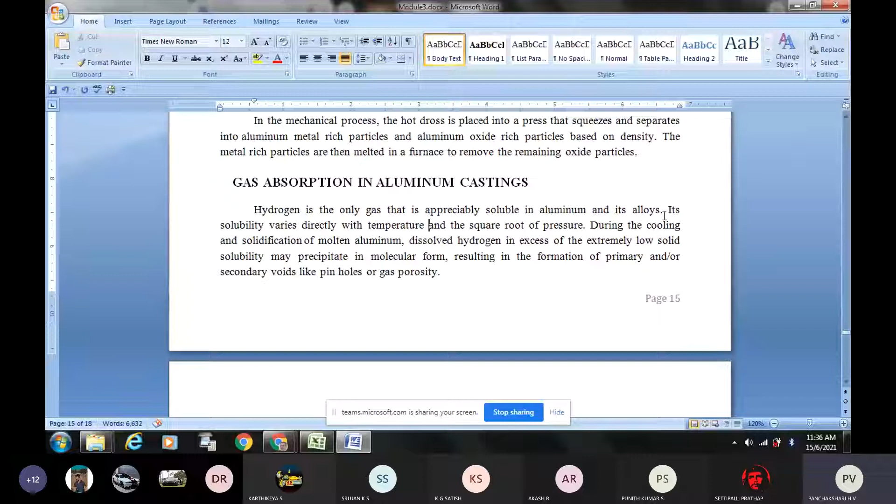The solubility varies directly with temperature. What does that mean? Higher the temperature, higher the capacity. If liquid metal is heated to a very high temperature, for example the melting point of aluminum is 660 degrees centigrade, but if it is heated up to 800 degrees centigrade, then the solubility capacity of the liquid metal for hydrogen is very high. But lower the temperature, the solubility limit will also come down or decrease. So its solubility varies directly with

temperature and the square root of pressure. Normally pressure is not considered because the melting is taking place at atmospheric pressure only.

During the cooling and solidification of molten aluminum, what happens? Dissolved hydrogen in excess of the extremely low solid solubility may precipitate in molecular form, resulting in the formation of primary and/or secondary voids like pinholes or gas porosity.

You should understand, when the metal is in the liquid state, its ability to dissolve any gas is very high. When it becomes solid due to removal of heat or cooling of the metal, it becomes thicker liquid metal and then finally solid. During this process, with the removal of heat, the capacity of the metal to hold the dissolved gas decreases. Higher temperature means higher capacity to hold the gas, and when the temperature decreases, its capacity to hold the gas decreases. Then what happens?

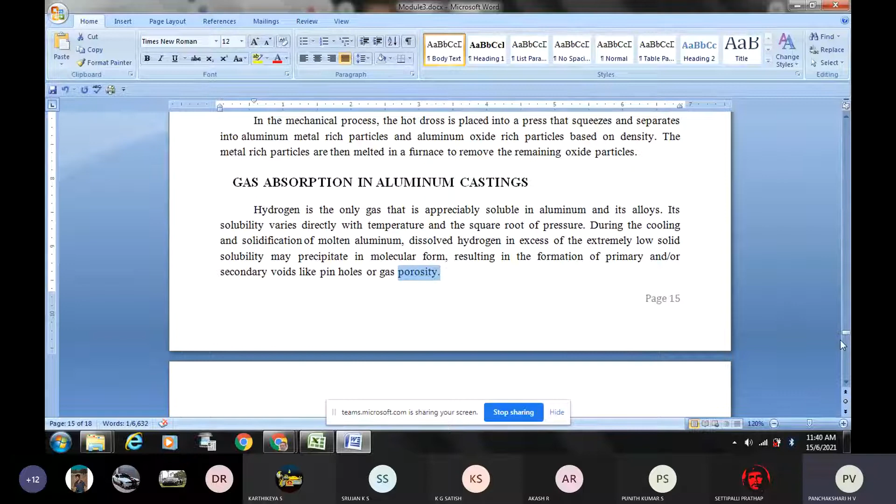So therefore, hydrogen is the major element which is being absorbed by the liquid metal, and therefore it has to be properly removed. That is the meaning of this.

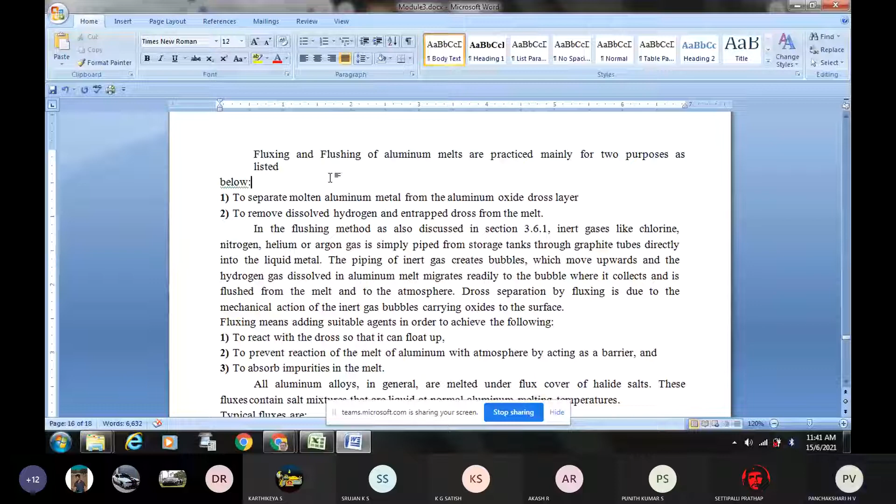Okay, so this is called gas absorption by aluminium metal, liquid aluminium.

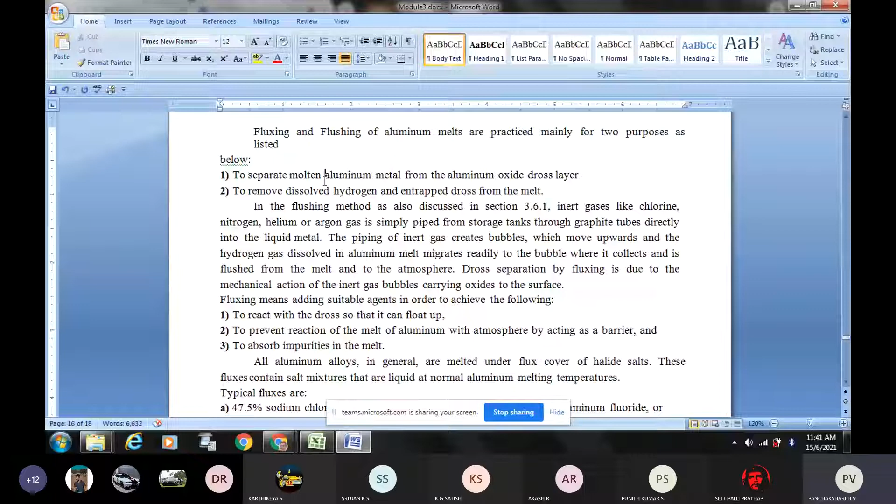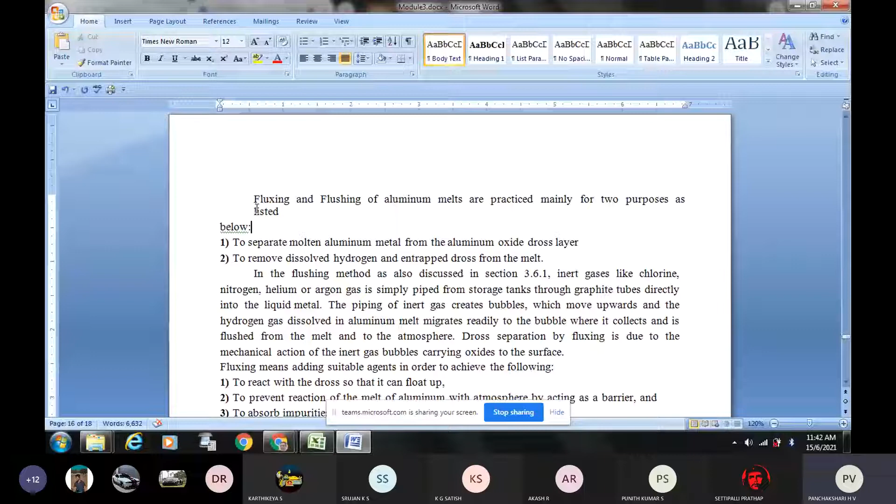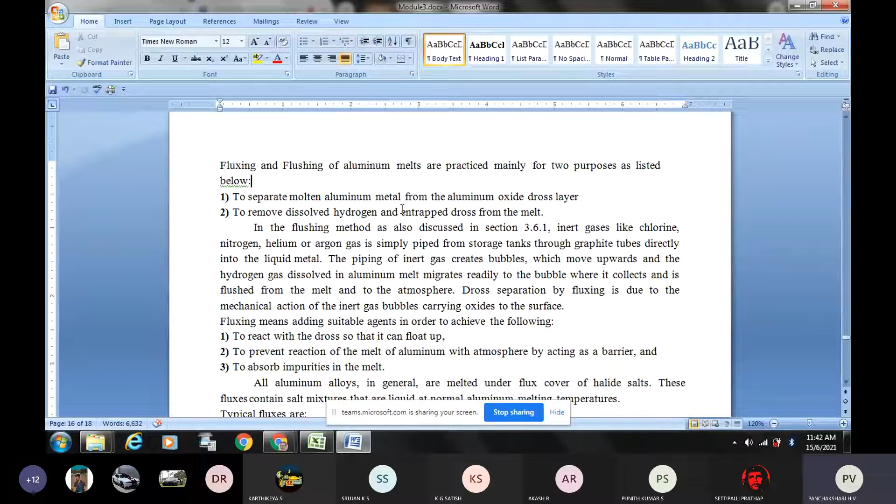To separate molten aluminium metal from aluminium oxide or dross layer, fluxing and flushing of aluminium melts are practiced mainly for two purposes. We are going to use the flux. What is the purpose of fluxing? We are going to supply flux like chlorine, fluorine, etc. Why is it required, and why is flushing required? It is required to remove the gas and remove the oxide layer or dross. It is carried out for that purpose.

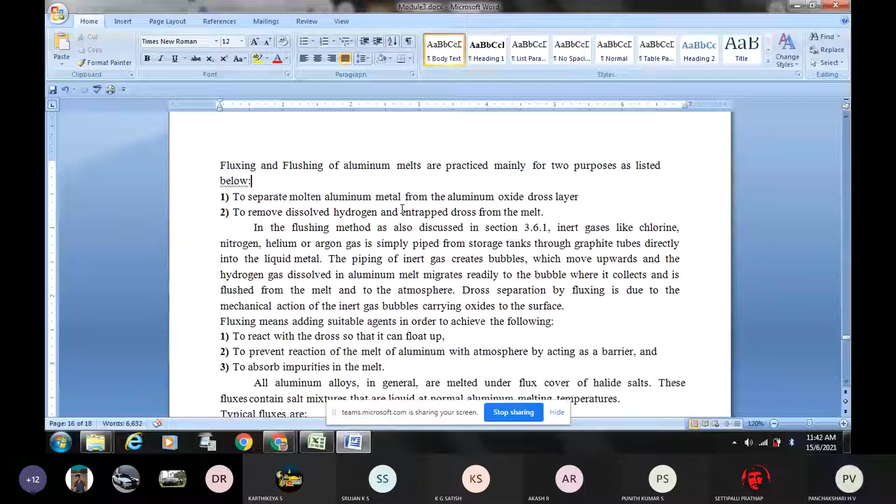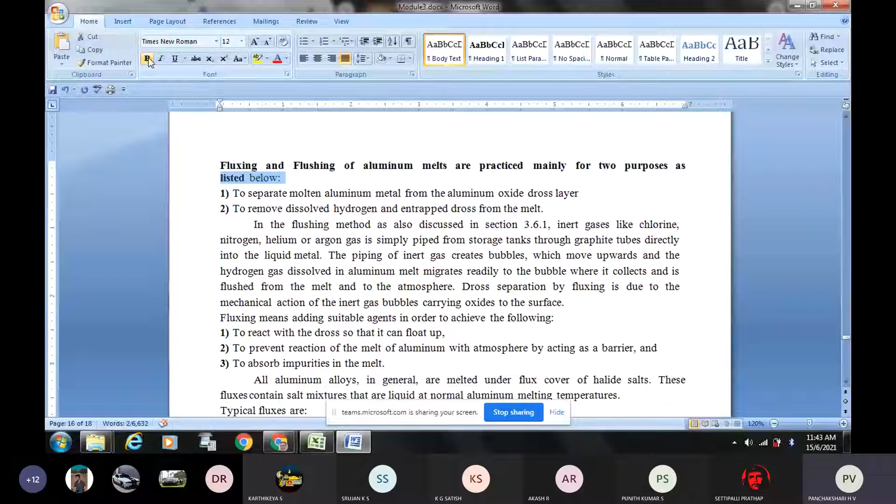What is happening in flushing? Flushing is carried out to separate the molten metal from aluminium oxide and to remove the dissolved hydrogen gas. Two operations are carried out here: flushing operation and fluxing operation.

In the flushing method, as discussed earlier, inert gases like chlorine, nitrogen, helium, and argon are simply piped from storage tanks through graphite tubes directly into the liquid metal. So what is flushing? We already showed that in our previous class.

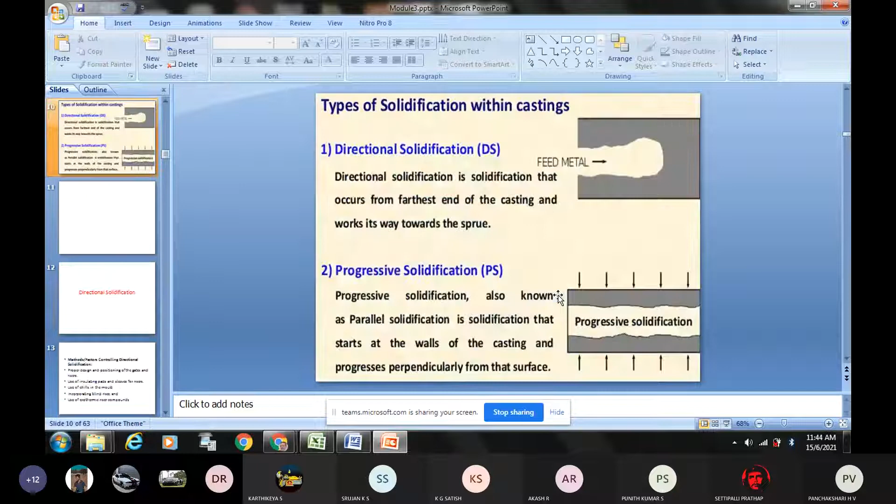One second, I will show you that diagram. Flushing, with the help of this diagram, I will show you how the flushing is carried out.

You can see this diagram. This is the chamber, the furnace chamber or crucible. Into this, there is a motor connected to a rotor. When the motor is switched on, there is a fan type rotor at the bottom that will start rotating, causing the stirring action.

By that time, we are supplying the inert gas into the liquid metal, so that it produces bubbles. By bubbling, it breaks the dissolved gas from the liquid metal. During that operation, the dissolved gases liberate from the liquid metal and come to the surface of the liquid. So like that, here also it is carried out.

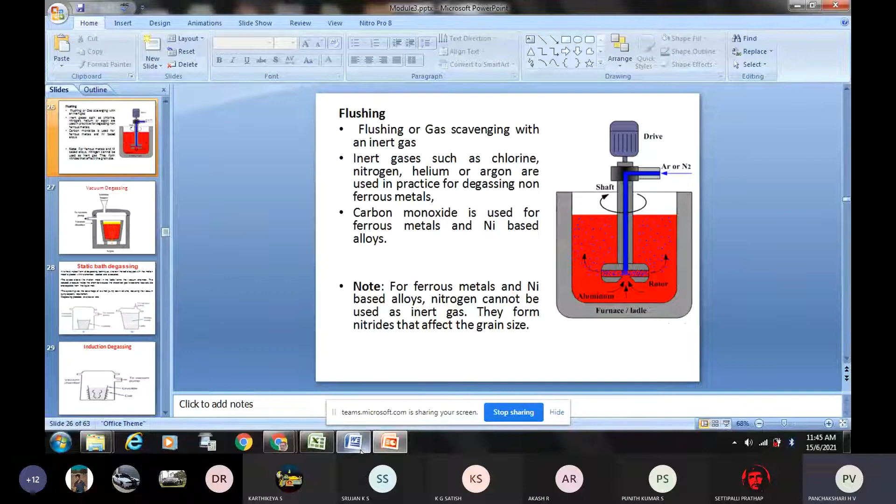The same process is carried out here also, that is called the flushing operation. And what is the fluxing operation? We are going to supply the flux. Flux is supplied to remove the dross.

We are supplying chlorine, which is also available in tablet form. We have to insert the chlorine tablet in the liquid metal, so that the tablet dissolves, and then it helps in removing the dissolved hydrogen gas within the liquid metal. So that helps to remove that.

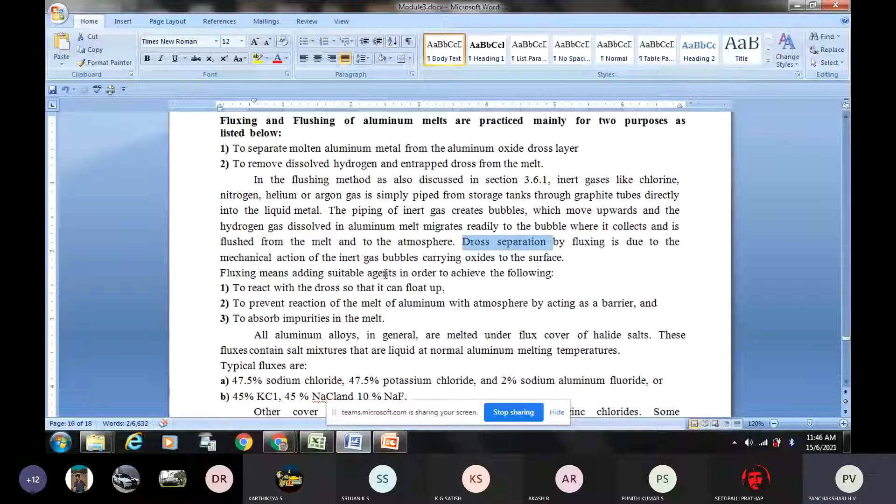So fluxing means adding suitable agents in order to achieve the following. What is achieved by adding the flux? It reacts with the dross so that it can float up.

Sometimes dross, that is impurities, will be set in between the liquid metal, and we have to bring it to the top. For that purpose, we supply the required agents like chlorine, fluorine, chloride, fluoride, etc. Either in gas form or tablet form, some forms are there. They react with the dross and help bring it to the surface.

Flux prevents reaction of the melt of aluminum, that is liquid aluminum, with the atmosphere by acting as a barrier, avoiding gas absorption, and to absorb impurities in the melt. By using the flux, it absorbs the impurities from the melt and makes them float.

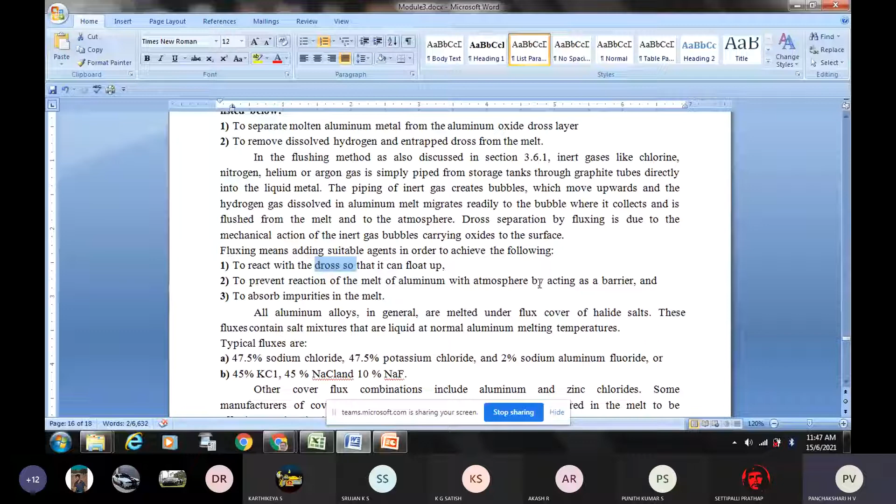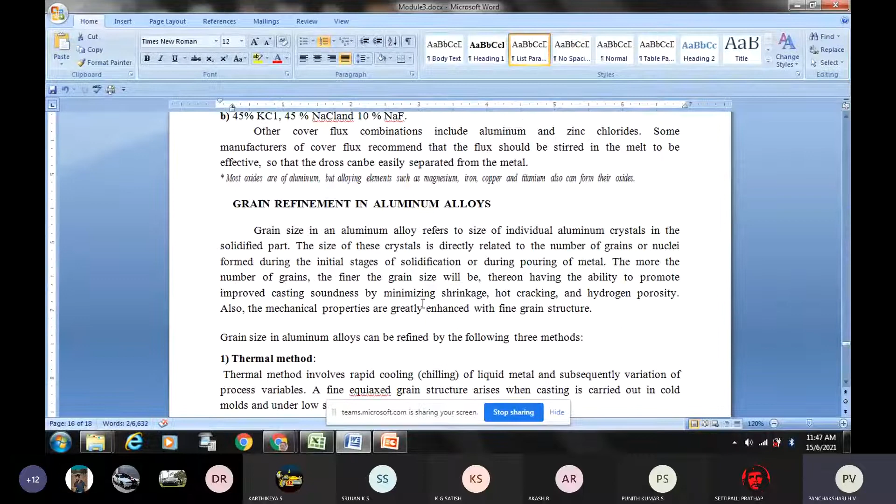These are the purposes or functions of the drossing agent, or fluxing agents, that we are using. This is about the different flux, gas absorption, and how to remove it. This is the topic we have discussed today.

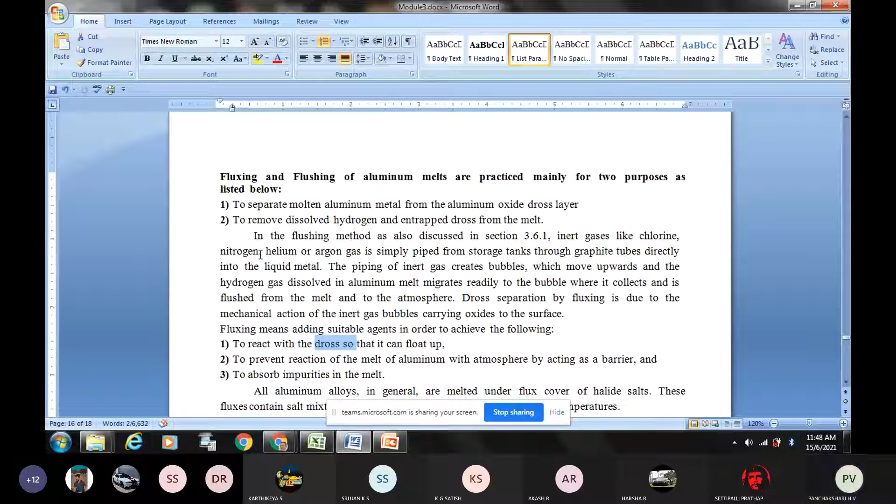The typical flux combination is also given; you can see the combination of fluxes. The flux being used in the aluminum melt: 47.5% sodium chloride, 47.5% potassium chloride, and 2% sodium aluminum fluoride.

The second option is 45% KCl (potassium chloride) and 45% NaCl (sodium chloride), with 10% NaF (sodium fluoride). These are some of the fluxes used when melting aluminum and producing aluminum castings. These fluxes are very essential for removing the dissolved hydrogen gas and removing impurities.